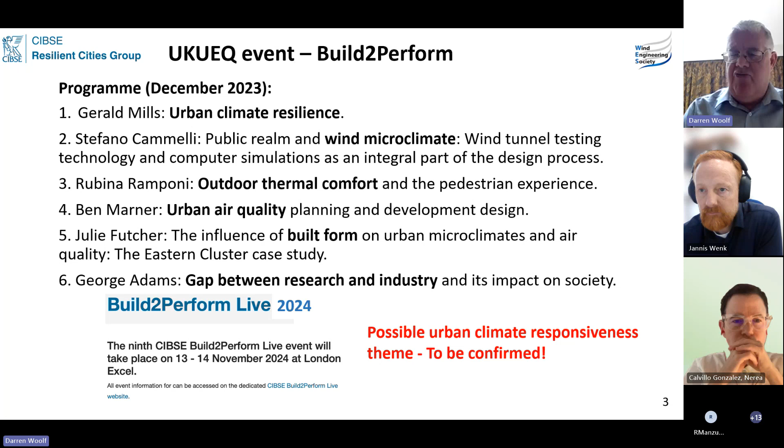So we have a number of other events that we're co-hosting during the course of this year. One is on bluff body aerodynamics and applications colloquium held at University of Birmingham in July, August, and this mini symposium is on simulated vegetated urban areas. The sorts of things that we're going to be talking about is wind, vegetation, tree drag coefficients, level of detail, effects of trees and parks, and also on turbulence as well, large eddy simulation of vegetated urban areas. The exact date and time is yet to be decided.

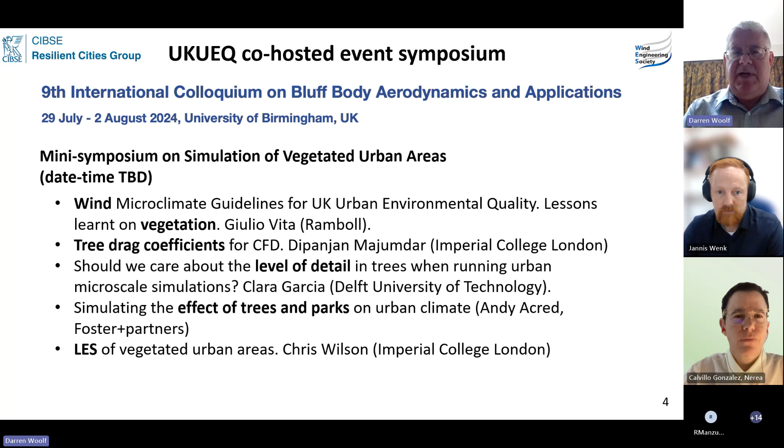The second mini symposium that we're co-hosting is part of the UK Conference on Wind Engineering. So this is WES 2024. We've got the day and time of our panel session on urban environmental quality agreed. We've got the panel members agreed. There'll be myself, Stefano, who's also the WES UK Wind Engineering Society chair, Steve from Air Quality Consultants, Giulio from Ramboll, Marilena from University of Kent, and maybe one or two more. And it's been organised by Martin from Imperial College.

So I mentioned publications. We've got 4 on the go at the moment. The first, which I'm leading, is called CFD Modelling of Urban Vegetation Systems. So this was something that over a year ago we had the proposal accepted by CIBSE. It's a CIBSE technical memorandum, so it's a technical guidance. We're currently about at the point of 85% first draft. So this is something that definitely will be published later on this year.

We have a second one looking at computational modelling of outdoor thermal comfort, being led by Rubina at Arup. A third one, you may be aware of the wind microclimate guidelines for the City of London. There's a take on that, taking it forward to all UK cities, led by Rob at Wirth Research. Then there's a modelling of outdoor air quality, led by Jenny at CERC. We don't believe this is ready for pulling together into technical guidance at this point in time. We need some more research, some more development work. So this might be a white paper or position paper that we publish over the course of the next year.

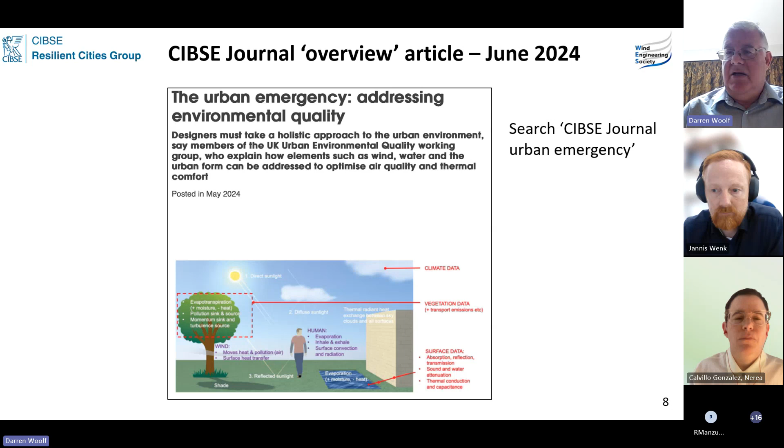I mentioned the CIBSE Journal article that was published last week. So if you search CIBSE Journal Urban Emergency, you'll quickly get to this. So this was an overview article, and on the front of the article, they picked one of the images from the white papers, which catches quite nicely a schematic of urban physics. And urban physics defined as a science and engineering related to air, heat, light, sound, water, and surfaces.

So besides the urban physics I talked about there, the key part of that is the urban morphology and surface materiality, which drive local climate. This is an area that we need to understand a lot more about and understand its impact on all the various aspects of urban design and its impact on the urban environmental conditions, and whether we currently adopt one process for designing our buildings, whereas perhaps there could be alternative processes driving the design solutions if we thought about having different local climate zones. For example, does shading drive a solution, or wind drive a solution?

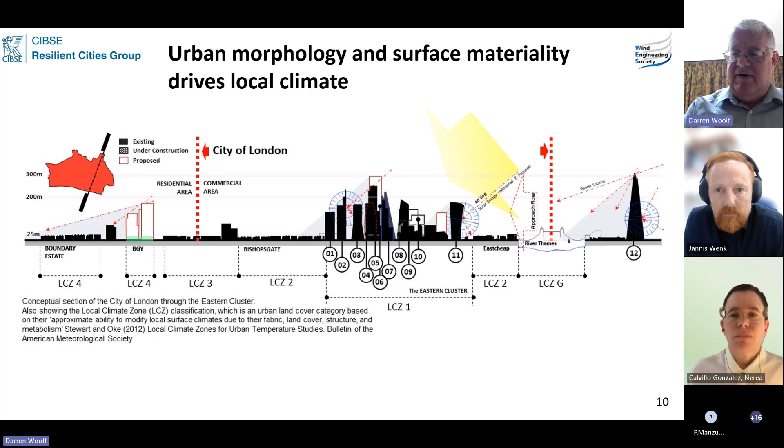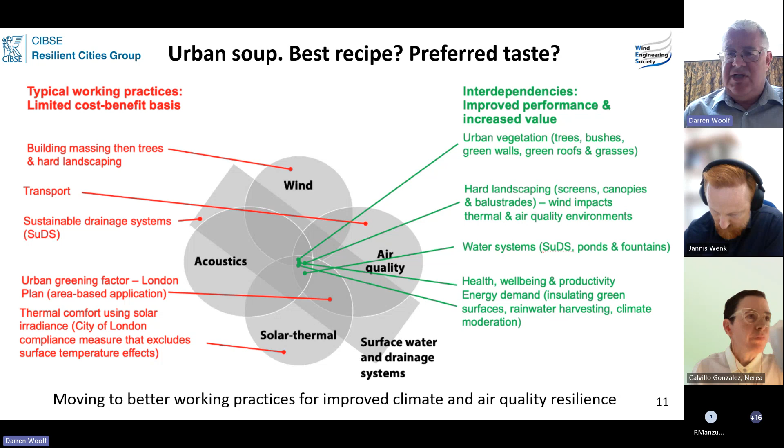But in reality, if we Venn diagram up all those ingredients to the urban soup, there are many interdependencies, and we could potentially improve our performance and increased value and better decision-making processes. And it's about understanding how these things work together. So we don't really know what the best recipe is. We have some targets that are individual targets, but the combined targets, the preferred taste, again, is something we're not that sure of.

So the design language is quite limited at the moment. You may, for example, talk about sustainable drainage systems on a scheme, or green roofs. Are you talking about the metrics of blue-green roofs and their performance, and how they might, as a higher performing system, improve the environment?

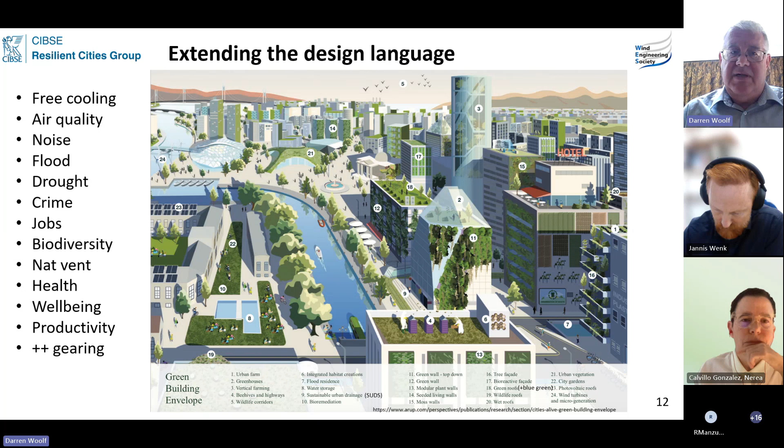Probably not. Beyond the surfaces, beyond the external building envelope, there's a whole range of different areas listed there that we may again talk about, some of them in isolation, but certainly not together. So this is a simplistic view, a number of generalizations.

I'm not talking about bursting the academic bubble, it's about moving the engineering wall. Currently it's heavily siloed in academia, with a big focus on research papers. We can all pick out the variants to this, but when we look in the engineering circles, there's a massive focus on compliance. Are we meeting regs and planning requirements? There might be an awareness of some of the technical guidance.

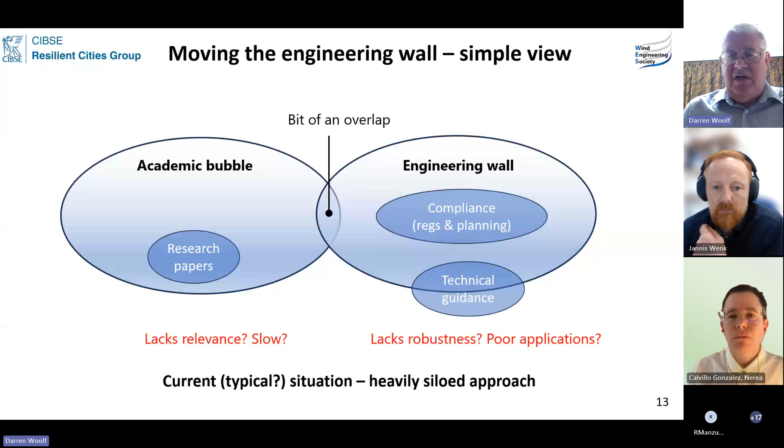Is the academic side lacking relevance and slow? There might be perceptions along that line. Is the industrial side lacking robustness and poor applications? Again, there's evidence of this, and certainly perceptions of this. So we're actually in an urban emergency. What's the optimized solution for emergency response?

Moving the engineering wall. How do we get a lot more of the industrial engineering side in and the research papers feeding easy access technical guidance, something that engineers actually pick up and read, and then have that focus beyond the minimum targets for compliance, but a performance-led design where we include the back checks on these minimum targets where those methods have been defined.

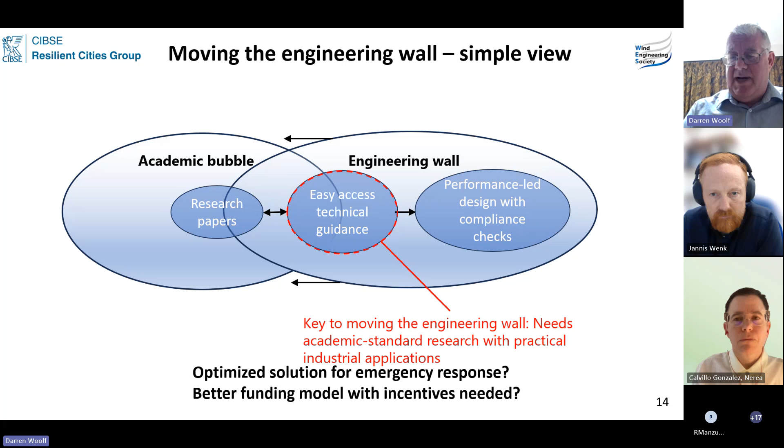Do we need a better funding model? I suggest we do, and more incentives for this to happen, but we are trying to respond to an emergency. And so to move that engineering wall, we need more academic standard research with practical industrial applications. Some advanced urban environmental questions.

We quite often pick a climate, design a building, but what effect do our building and the surrounding buildings have on the urban environment around us? How are they, for example, generating cold downdrafts, impacting urban heat island effect at ground level? How do the combined wind and temperatures impact wind chill, or the reputation and commercial success of a space on those colder days? How do wind and air quality combine together?

There's a big focus on excessive windiness. I'm aware of one wind death case in 2011 up in Leeds, which has really focused our attention on the excessive or high wind speeds. But what about those low wind speeds, with perhaps 4,000 air pollution attributed deaths in London per year due to air quality, and flushing out that poor quality air?

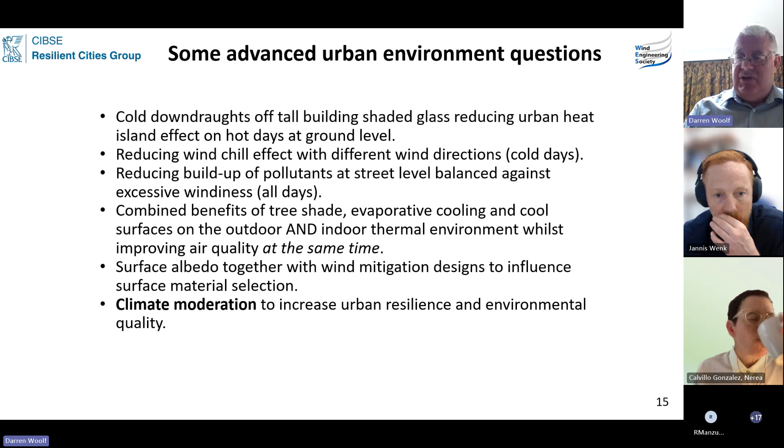Then there's combining all these various aspects, shade, cooling, outdoor and indoor together, and air quality all at the same time. Talking a lot more about surfaces, a bit of talk about albedo or reflectivity of surfaces, but also surface material selection. And then it's not just about urban heat island discussions, but climate moderation. How do we increase our urban resilience through climate moderation? So a little bit more on that.

On a cold day, you could imagine that you've got unshaded hard surfaces at about 0 degrees or less, and shaded or unshaded vegetated surfaces a bit warmer than that. On a hot summer's day, those vegetated surfaces might be about 30, 35 degrees if they're in the sun, but the unshaded hard surfaces might be 60 degrees or more. So I mentioned the urban heat island effect on the hot side. A lot of our focus is on that. But there is also an urban heat island effect on the cold side.

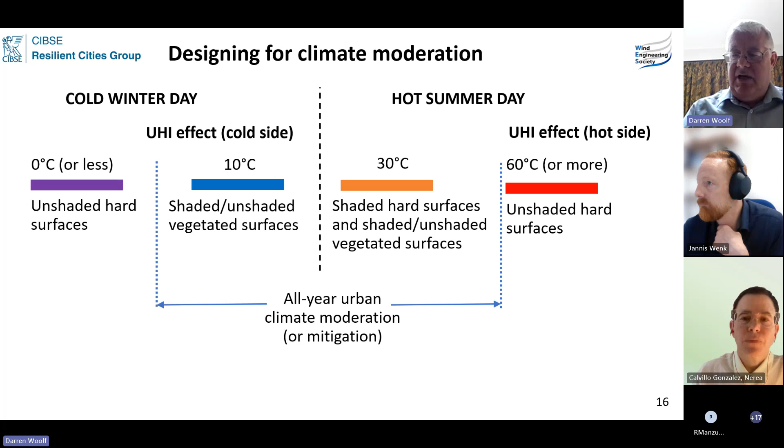And if we talk about climate moderation or all-year urban moderation or mitigation, how are we positioning those designs? Cold side attributed deaths are perhaps an order of magnitude more than hot side deaths. So where is our annual temperature target? What's our best one? How can it be optimized for that? Quite often energy drives a lot of the thinking, but if we've got an optimum positioning of our annual temperature, then what is the impact on our annual energy demand? Perhaps that's a better way of thinking about it.

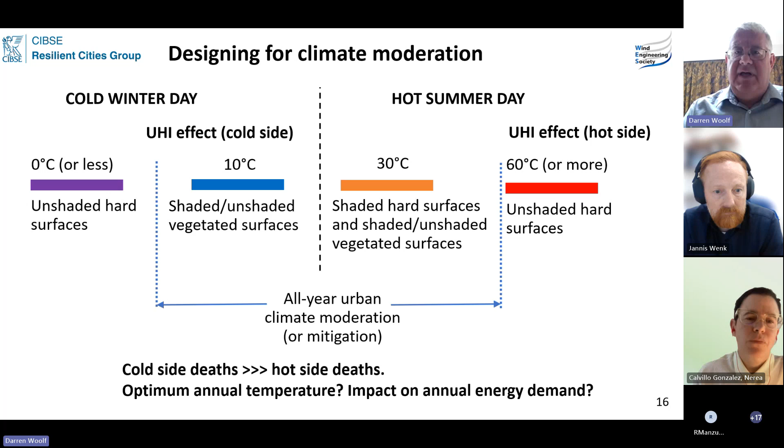So I mentioned this publication, CFD Modelling of Urban Vegetation Systems. On the wind resistance side, some of our findings that we're putting in there: we're looking at a volumetric drag model for trees, shrubs, bushes and hedges. It's different to a classic drag coefficient approach, which is more like a thin surface approach coming out of experimentation.

Model resolution and how that relates to capture of velocity decay. Again, this is horizontal and vertical winds due to downdrafts, how we understand that dual approach. And then potentially this could have a big impact on computational wind engineering models and BATNEEC good practice. That's where we're designing our publications, best available technology not entailing excessive costs, and how we do that in terms of geometry as well.

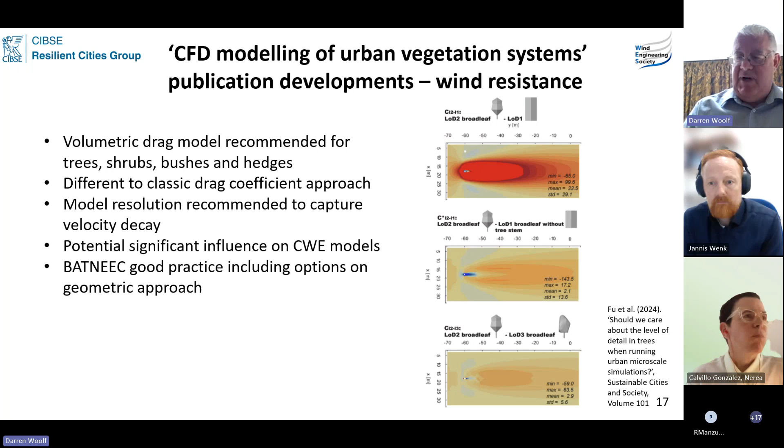On the evapotranspiration rate and sensible and latent heat gains, it's a very complex system, urban vegetation systems. We're looking for a compromise application for industrial usage. You might have over 200 trees in a master plan model. There's a top-down approach where you've got the water demand specified, a bottom-up approach where you're picking plant types and thinking about water stress. It includes the total absorbed radiation, which determines the sensible and latent heat gains.

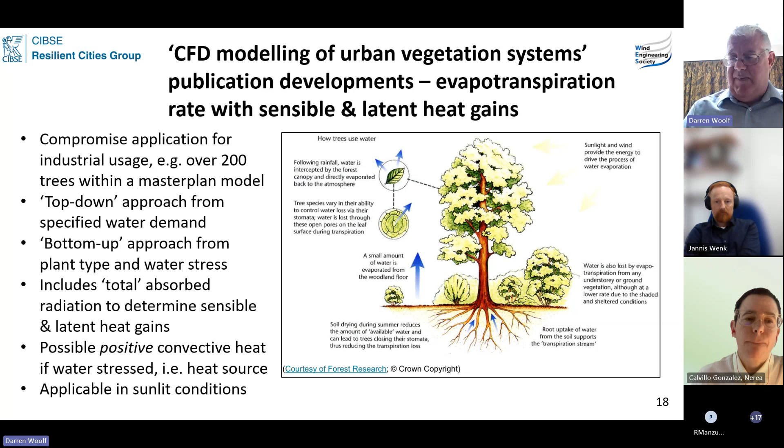And in this compromise model, we think typically that vegetation generates cooling. But if you've got high levels of radiation and water stress, it could actually become a heat source beyond the shading to the nearby surfaces. And this model is applicable in sunlit conditions.

Summary and conclusions. So we're in an urban emergency. Our cities are at increased risk from climate and air quality, the emergency that we need to deal with and respond to. At times, the environmental quality is extremely poor, leading to significant health risks and reduced productivity. This leads to higher costs for urban living. That's a key phrase there. So how do we move from that first cost mentality on our developments to much wider co-benefits, understand the cost of urban living and put that into our deliberations.

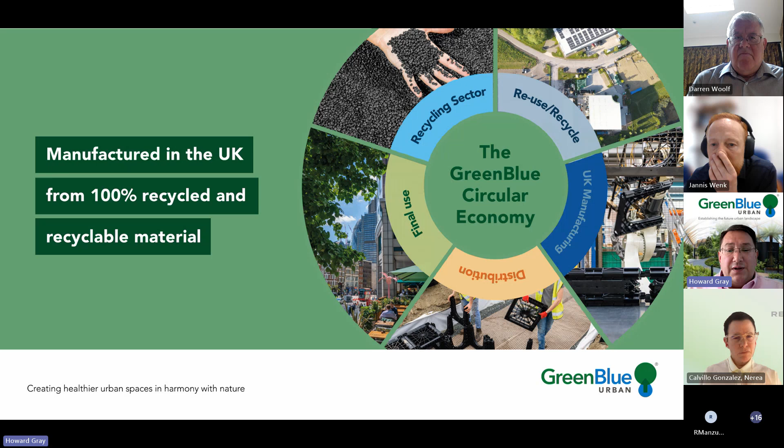So GreenBlue Urban have constantly worked at making sure that every tree we plant has the ability to hit species potential wherever it is being planted. And we do this by using these waste materials, waste plastics, 100% recycling them and using them to make solutions that really work. In fact, they are guaranteed to work, and I'll touch on this later. So, made in the UK from 100% recycled and recyclable material. And this is down near Hastings, where we have our manufacturing plant to make these products that are able to help us guarantee the life of the tree.

So we have our own recycling machinery, so we can actually chip up any waste material and then use that back into the manufacturing process. And as we use very high quality recycled polypropylene, this means this can be done pretty much an infinite amount of times without losing structural strength.

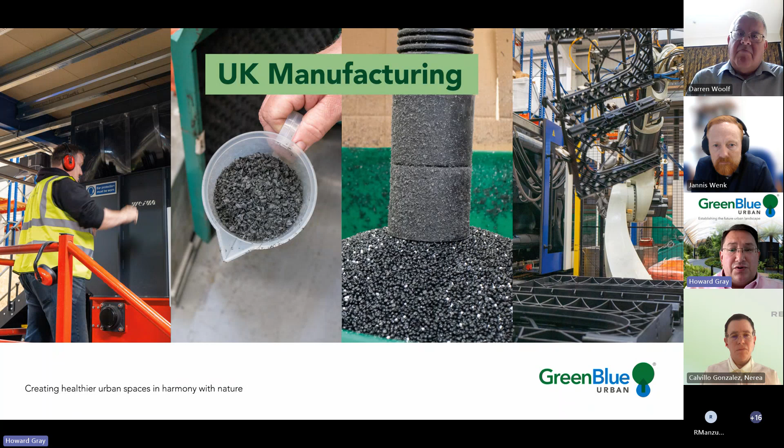So the RootSpace Arbor System solution is really a soil cell that's able to withstand heavy loads going underneath trafficked areas to provide the tree the ideal optimum rooting environment, really recreating the forest floor environment underneath a paved surface.

And this is really important because what we're doing is we're creating this soil, keeping the soil healthy, keeping it uncompacted, keeping it aerated, so the tree is able to attain this maturity that really starts bringing us the benefit. A mature tree brings us so many more benefits than a small struggling one, that it's important that we are planting not more trees, but we're planting trees that will attain greater age and greater size.

And the soil cell system comes complete with legs and infill panels and aeration lids, and able to take loads of up to 40 tons a square metre. And these are available from stock, available very, very quickly.

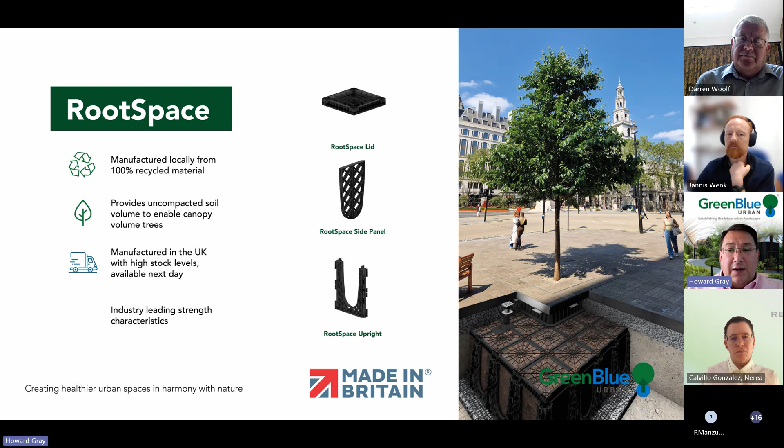Now, one of the important things is we're beginning to look at the actual value of trees along our highways. And this is really interesting because what we find is there's a number of different benefits that perhaps are more than we originally thought. Whether we're talking about even something like protecting our asphalt, we find that local authorities are realizing that these hotter summers that we're having are causing road surfaces to break up quicker than they used to. And this is really interesting.

A highways engineer told me recently that many of the potholes we're struggling with are actually caused by the cracks that occur in the summer with the extreme heat, which are then forced apart by the rain in the autumn and winter. So we're seeing some quite significant differences. Even things in noise pollution can be massively mitigated again by green infrastructure. That's not just trees, living walls, green roofs. These are all helping that noise reduction that we're looking for.

So GreenBlue Urban have published this book, which is free to download from the greenblue.com resources tab on our website, which is looking into urban trees, highways and utilities, how we can work around all these challenges that we find underneath the ground to actually make sure that we make enough room for our green infrastructure to grow to maturity.

This is an interesting project that we're still working on in Glasgow. Sauchiehall Street is one of the main feeder streets that runs in from the west end of Glasgow into the city centre. And Glasgow City Council commissioned the first phase of this project, which goes back 6 years ago, where we planted trees down what was basically the middle of the street, separating cyclists and pedestrians from the motorists.

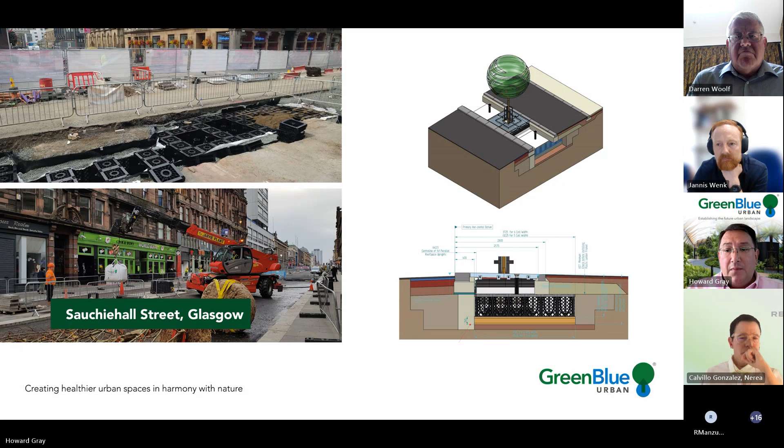And this next phase, which we're just installing at the moment, is taking highway runoff as well. So this is really beginning to bring those green, those blue, those grey elements together in a really interesting and innovative way within the city centre. As we can see, the first phase, we've got some really mature trees now that are growing very, very fast indeed, and bringing us those benefits within 5 years of planting.

I mentioned before that we can actually guarantee trees, and this is the first company in the world able to do that. We can guarantee a tree to its full health in up to 15 years. If the tree fails for any reason that's to do with its rooting system, then we will pay for that tree to be replaced completely, including all capital and construction works.

Now, this shows us a sign of our confidence in our system, because what we say is that trees don't die. On the whole, they are killed. And so what we must do is by planning for the tree, providing for the tree, and protecting that tree, we're giving that tree the very best chance of attaining that species potential.

Another interesting project that we worked on is in Manchester, in St. Peter's Square, which is one of the most heavily urbanised areas we've ever worked in. We've got trams running right through it, we've got buses, we've got dust carts and emergency vehicles, and yet we've got some huge trees that have grown extremely well.

These trees in under 10 years have hit their 40-year size expectation by giving them really good conditions and really helping them to establish quickly. I was up here on the hottest day of the year 3 years ago, and what we really found was that these trees are really giving us some massive heat island cooling effects, and people were moving from the shade of one tree to the other to take advantage of them. So it's possible to actually look into how these can work for us.